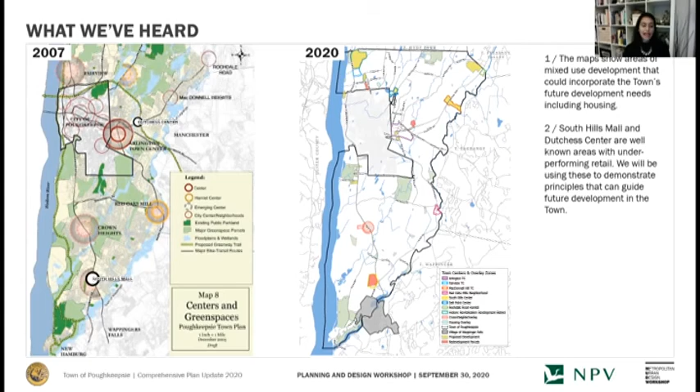So we're going to dive a little bit deeper into two areas, Dutchess Center right here and South Hills Mall. But this does not imply that these are the only places that can accommodate redevelopment. These were selected because most people are familiar with them. And the idea is that today we'll discuss how we can demonstrate and illustrate, through the help of these sites, best practices and how they might be incorporated to guide future development in the town.

So I'll walk you through some of the placemaking principles or best practices that can make for inviting and successful places. First, this slide talks about walkability. This is a highly desired goal that contributes to how welcoming and vibrant a place feels. But let's take a closer look at what actually goes into making a place walkable.

Safety can be achieved in a number of ways, but I think the one that is most pertinent in the context of this town is traffic safety. Using methods that allow for traffic calming, like wide sidewalks, bump outs at intersections, proper signage, and balancing the proportion of sidewalks versus space dedicated for car movement becomes really important.

In addition to traffic safety, things like transparency on the ground floor level, dedicated outdoor space, and good landscaping design also make for a more inviting environment. This is especially important given the current social distancing needs and a potential future emerging out of this trend. These images are from Mashpee Commons in Massachusetts, and they show how these elements can work together to create safe and inviting environments.

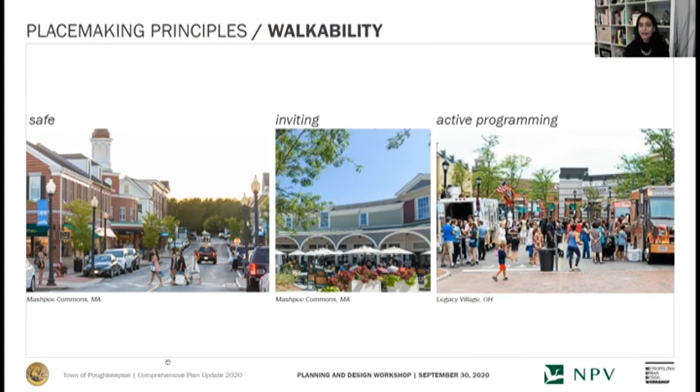We briefly touched upon the importance of outdoor spaces in the previous slide. While I don't imagine there will be any large events in the near future, what I wanted to show here is just how places that are flexible and can accommodate social distancing requirements, as well as be available for use throughout the day, can serve as great community spaces. There is an opportunity to create these places in these developments.

Now we come to another really important principle, which is mixed use. By mixed use, we mean a balanced combination and thoughtful distribution of residential, office, and retail, which can add a lot to the vibrancy of a place, promote a healthier live-work relationship, and also keep a place active by day and night.

This example to the left is from Legacy Village, Ohio. This is always cited as an example of a successful mixed-use community that has a combination of 1 to 3 story buildings packed in a really compact development pattern, which provides the critical mass needed to support these uses both by day and night.

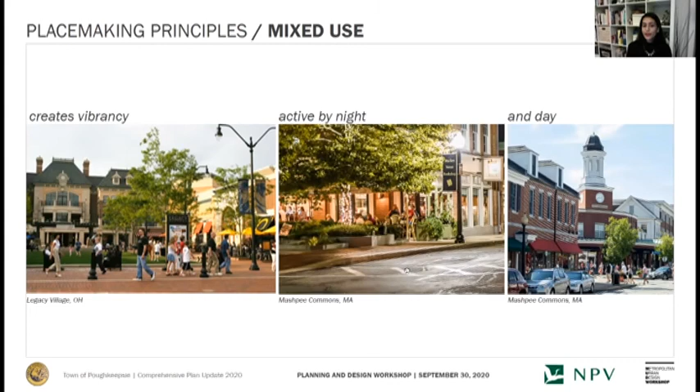What is great about mixed uses is that they keep an area alive during the day and night. These images from Mashpee Commons show active streets during daytime and nighttime uses that are supported not only by visitors to this place, but also by the residents who live in the area.

And then there is this reality that we all live in a cold climate, quite a few months of our year are quite cold. So how does one think about places that can still be usable throughout the year and don't lose their appeal in the cold weather? Thinking about how we do that is really important in this context.

The image on the left is from Princeton Shopping Center. What they've gone ahead and used as an architectural feature is sheltered and canopied walkways—a sheltered walkway on an indoor corridor, and on the outside, they're canopied.

And things like pop-ups and kiosks and winter uses like an ice skating rink that can be temporarily installed over community spaces also keep these areas active during the winter months.

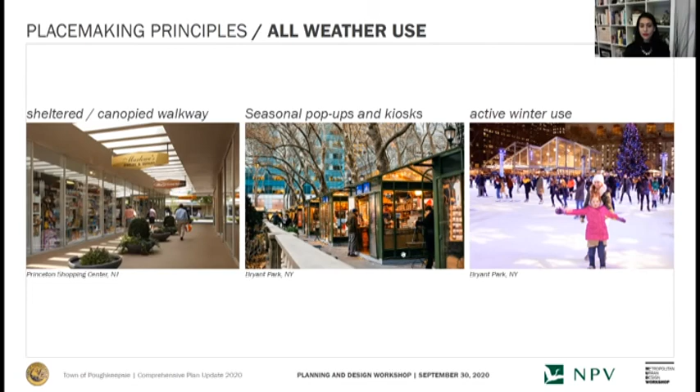The examples in the middle and the right are from Bryant Park. Bryant Park does a great job of transforming its park and walkways into an ice skating rink for everyone, and its walkways then accommodate both pop-up kiosks as well as pedestrians.

Another principle I want to talk about is local and national retail. I think that a balanced mix of both local and national retail is always a really good underlying strategy that provides ample choices for a variety of users.

This in turn ensures the long-term viability and success of a place, especially through different market cycles. So I think it's an important placemaking principle when you take the long-term view.

We discussed streetscapes and civic spaces briefly in our earlier slides from the point of view of safety and programming. But what I wanted to call out here is the importance of design. An example I want to cite is from Arlington Town Center.

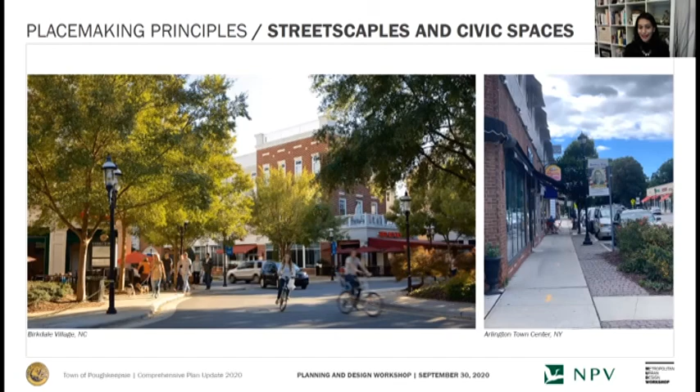I want to briefly touch upon environment as well, because Dutchess Plaza, which is one of the sites we will be discussing today, was built on a landfill. And it is also almost entirely within a 100-year floodplain.

And while there hasn't been any soil testing that proves there is any real contamination on the site, there still is a perception that the site might be contaminated because it is built on a landfill. So I thought it would be a good idea to discuss

phytoremediation here, because it is a very widely accepted, cost-effective environmental restoration technology. What it basically refers to is that we can use certain species of plants and associated soil microbes to reduce the concentrations of metals and other toxic contaminants in the environment.

A phytoremediation park can also act as a central community space, and it could also double up as a place for greater environmental awareness and education. So it's something to consider as a program.

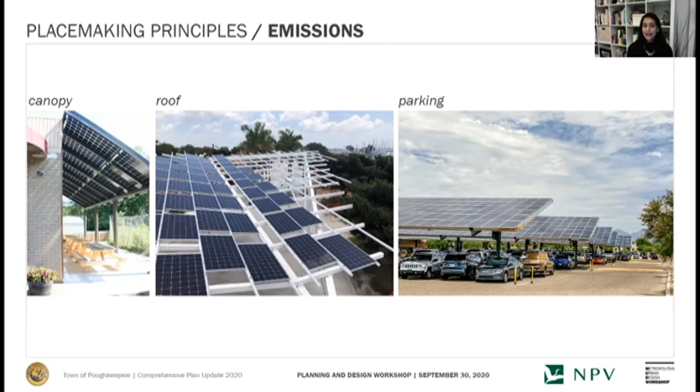When we visited the site, it didn't really seem that these buildings would lend themselves to any type of adaptive reuse. So I think a strategy here would be to consider the entire site such that redevelopment would be more ground up rather than an infill or adaptive reuse.

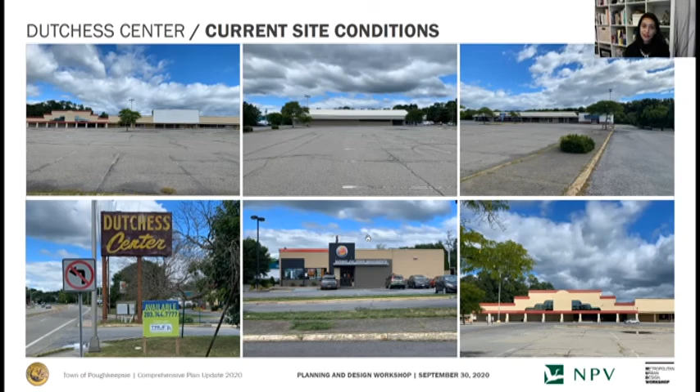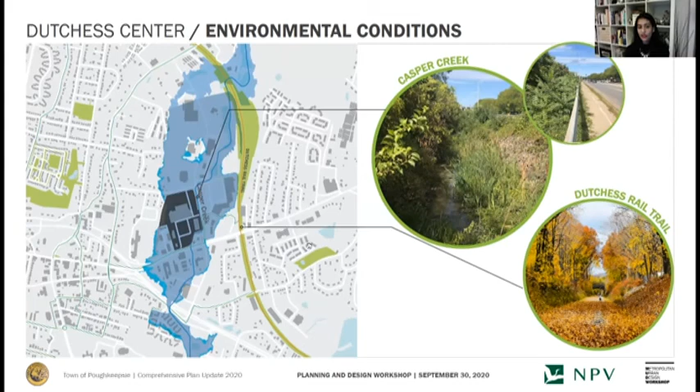Another thing to note is that through this little green bikeway and walk path, there is a connection to the Dutchess Rail Trail trailhead. You can see that closer in this slide.

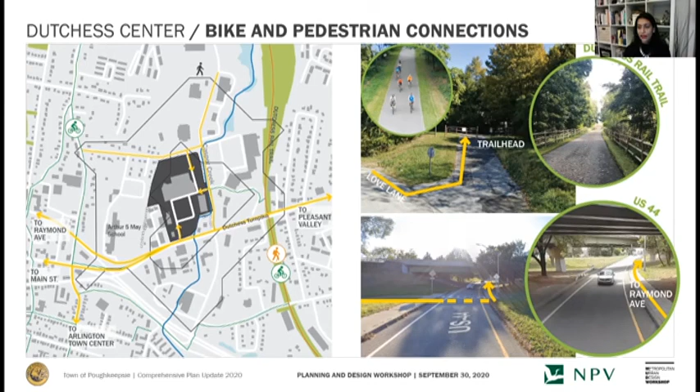It's good to note that the Dutchess Rail Trail trailhead is within a 10-minute walking distance, which is a huge opportunity. And then the other thing here is an opportunity to connect to the Arlington Town Center through this trail and going under the US 44.

In terms of vehicular access, the site is accessible on Dutchess Turnpike, and you can see it's a really wide route with very little refuge for pedestrians.

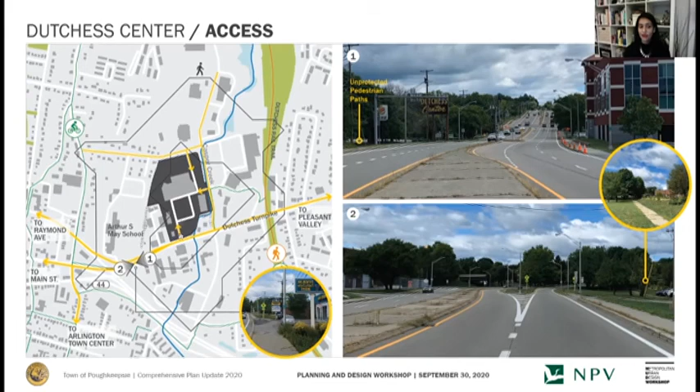There isn't really a traffic light at this access route from here on Dutchess Turnpike, but there is a traffic light at Burnett Boulevard, and it is probably a better access into the site.

At the back, through Friendly Lane, there is more of an access for service vehicles currently, and the green lines shown on the map show bike paths that surround the area.

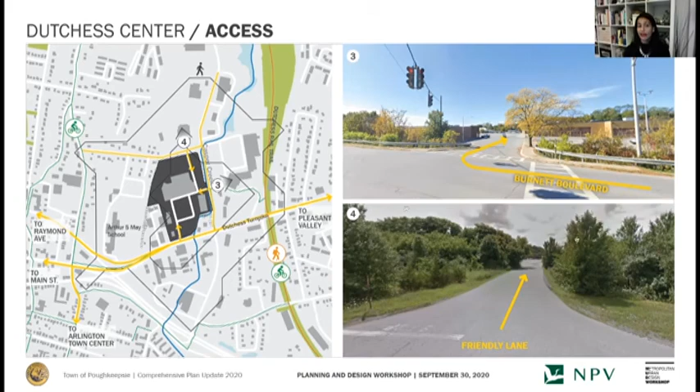There are several uses that are permitted. Again, at one point it was more thought of as a regional center, so we can again think about whether that is still relevant today or there needs to be some modification to that use.

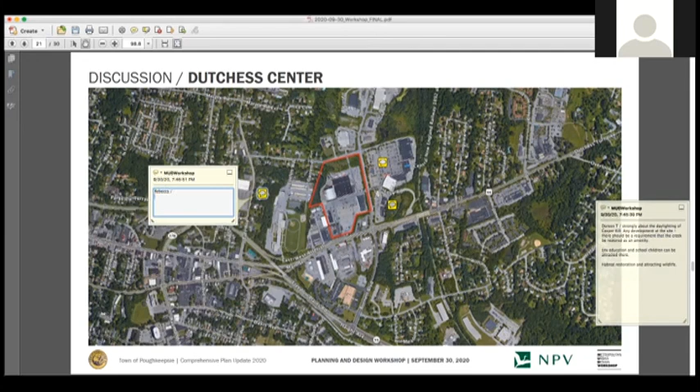Hi, how are you? Thank you so much for focusing on this site, which I think really needs to be redeveloped. One thing is that with the elementary school right there, it would seem like an ideal situation for young families, with the bike trail and already a grocery store, a bank, and a credit union available in walking distance, as well as the elementary school. Perhaps we might consider a development that's not necessarily exclusive for young families, but particularly tries to create affordable housing for young families and reduce their costs—maybe a place where you could live without owning a car.

A place that has free Wi-Fi, a place that might have childcare nearby, so that from the time your children are age 1 all the way up through 5th grade, when they leave Arthur S. May, you'd have places where your kids could stay nearby. Maybe there could be co-working space available for parents who might find a lot of their needs met very nearby. I have some interesting thoughts about the ownership of that site too, which is a little complicated, but that's for discussing another time. Thank you.

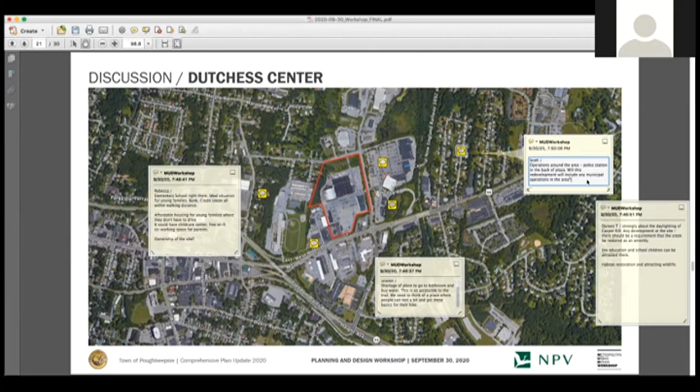The municipal operations you mentioned, to the north or behind the plaza, are actually a bit further north, so they don't necessarily have to move for this plaza to be redeveloped. But there has been discussion at different times about the facilities needs of the town, and the town's been doing some additional work on that. If you want to reach out to me in the planning department, I could point you toward those studies. Okay, all good, thank you. You're welcome.

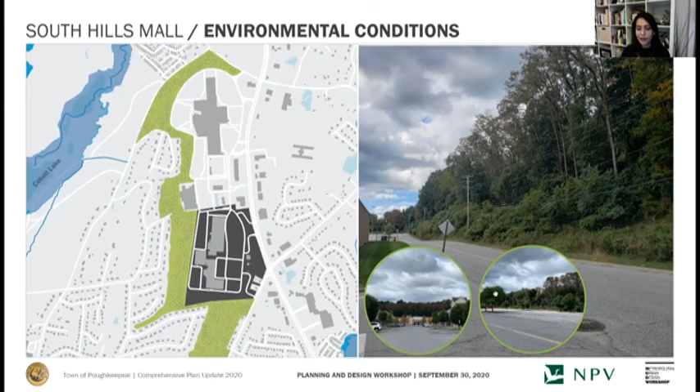But the more important thing is really just this buffer zone, which we can see to the right in this photograph. It's on higher ground. The site is pretty high and dry, and it is not within the 100-year floodplain. What's also interesting is that one can see this buffer zone because South Hills Mall is lower and these trees are a lot higher. You can see through these vistas in the distance the trees, and they're actually really beautiful. It's a beautiful buffer zone.

The next slide just talks about access to the site. Again, there is the 5 and 10-minute walking distance. Please do let me know if the slide has not advanced. Has the slide advanced for everyone? Okay, great. So there is the 5 and 10-minute walking distance that's shown here in the black line.

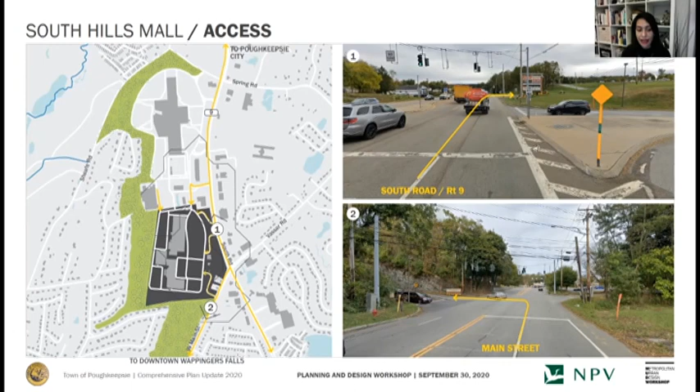The first image is showing access from South Road. The second image is showing access from West Main Street, which is a little bit calmer compared to South Road or Route 9, which is a highway. And in the back, this is service road number 3 right here.

The service road is right next to the buffer zone. It's actually really beautiful, even though most of the backside is taken up by parking lots. But maybe we could do something about how to intersperse parking lots with infill development.

And there is access from the shops at South Hills, number 4, which is again a more sort of smaller private street to get a more street-like character versus a highway to get to the site. But really it is accessed from South Road and West Main Street directly.

Another thing I'd like to point out is that there is this connection from the site where one can take West Main Street, which will take you to downtown Wappingers Falls. So if one does not want to get onto the highway, that is a connection that can be looked at as more walkable, more bikeable, and just safer than a large highway.

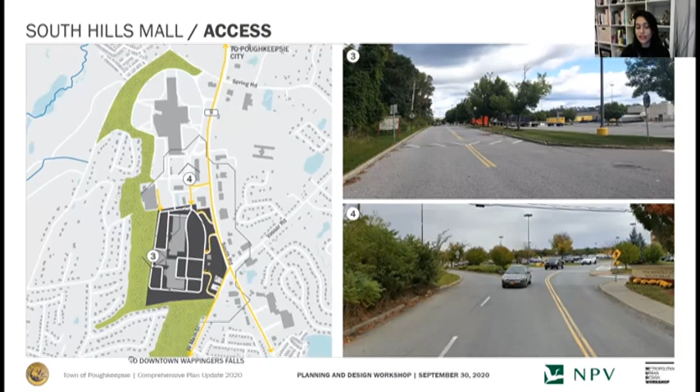I would like to point out that direct connection to adjacent areas through the buffer zone is not actually possible because of the topography, but what is possible is to take that connection I pointed out on the previous slide, to get onto West Main Street to access downtown Wappingers Falls.

And then, within the area itself, there was a purpose to create both an interconnected system for pedestrians and vehicles, and minimize the visual impact of automobiles with landscaping around the parking areas. So for that brief overview of the site...

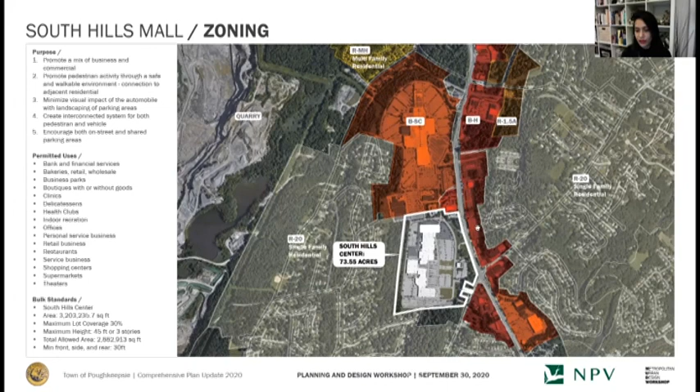Which I neglected to point out earlier, but I should say that there is multifamily residential to the north. It is not directly adjacent to the site we're looking at, but there is single family residential to the west of the site. Again, it is topographically on higher ground. And across the street, there is more commercial use.

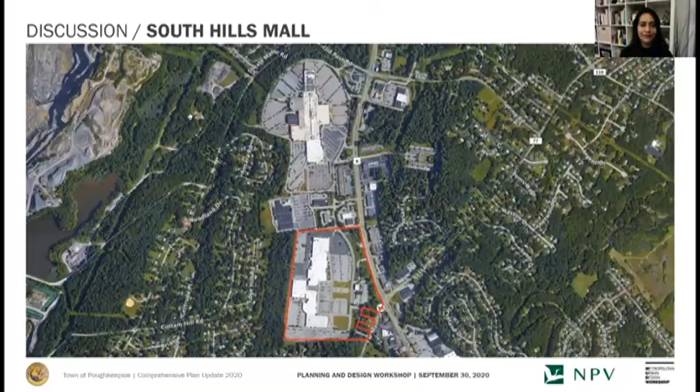Is everybody able to see the aerial image of South Hills Mall? I'm going to rely on you, Adriana, to tell me. Yes, we can see it. Great. So please let me know if you can still see it. Nope. Okay, that's what's happening. Is this okay? Yep, see it now. All right, thank you.

As you did in Dutchess Plaza, this is open for discussion and comments. So please raise your hand and Adriana will unmute you. Please introduce yourself and let us know what you would like to share with us, and if you have a question. Okay, Nancy?

Nancy, you're permitted to speak if you want to unmute yourself. Okay, I tried to unmute Nancy Kapler Foster, but she did not. She doesn't seem to be unmuting herself. Sharon Phillips?

Hi, this is Sharon Phillips. I see people biking down the median along Route 9, trying to get north and south and go to the mall. And I really wish that our concept and development was connecting communities, so that we're not like Wappingers and Dutchess and Spackenkill, that this is a smooth process where we move easily by bike or by walking to different communities. Right.

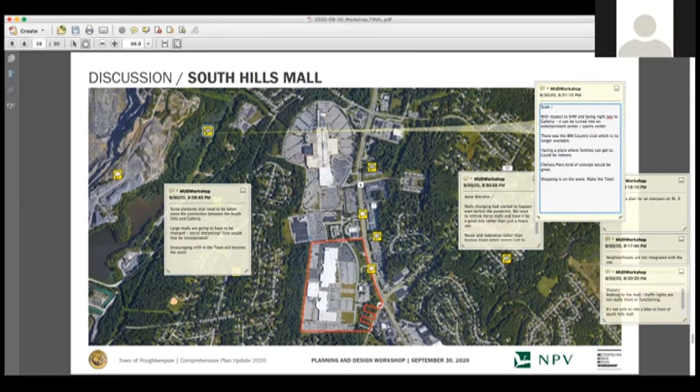We had a hand raised and now we don't. Ah.

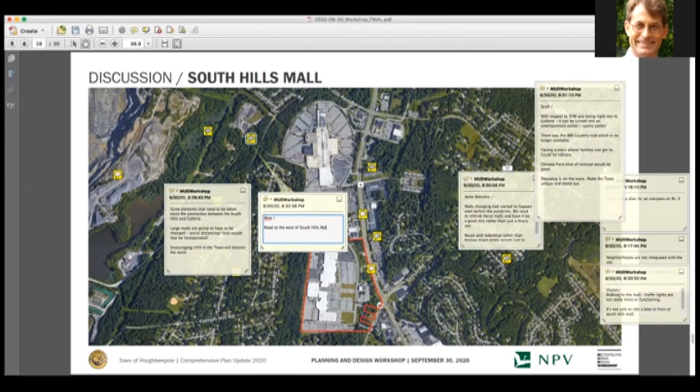Could you point to that road? Yeah, I believe it was between the two malls. There was a road that they cut short. Oh, the one that's ending right here, you think? Maybe, yeah. I just remember that they didn't want the traffic going through there, and so they disconnected that road.

But is that a possible access in the future as we decrease the volume, or with limited access through pedestrian or bicycle? Right, and I heard someone say earlier that at some point there was a proposal to connect the surrounding communities a bit better, but that the communities were opposed to the idea of the traffic going through them. But again, that's understandable.

But again, I don't know when, how long ago that opinion was held and how it has changed here today in 2020. So I think all of you are here today—what do you think?

There's a bit of a conversation going on in the chat. Cottam Hill Road was closed off. It went through about where Lowe's is now. So that would be where you were pointing? This area? Yeah, that is the Lowe's right there. What's the name of the road? Cotton Hill. Cottam? Yeah, we have it in the chat too, Sachi. So yes, yep.

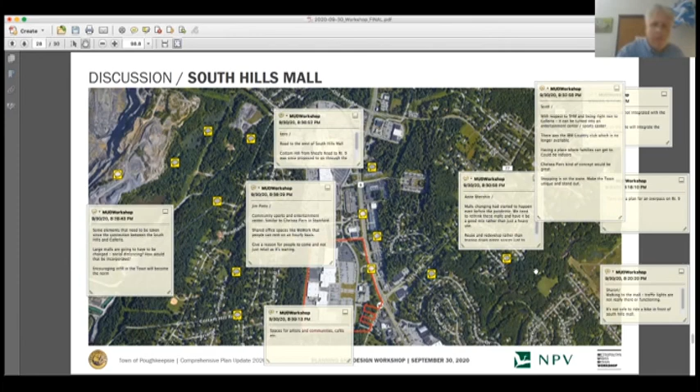This is Mike Welty from the Town Planning Department. I just want to thank you for your comments. We appreciate getting them, though this isn't exactly the right venue for them. The Comprehensive Plan Committee is really looking out 5 to 10 years into the future, and making recommendations about the entirety of the town.

I do encourage you to continue to make your concerns known to the Planning Board and the Zoning Board of Appeals, where both of those applications are currently being looked at. That's really where those concerns need to be addressed. I would hope these people would help future residents and the current ones, to do the right thing. Thank you very much, I appreciate your time.

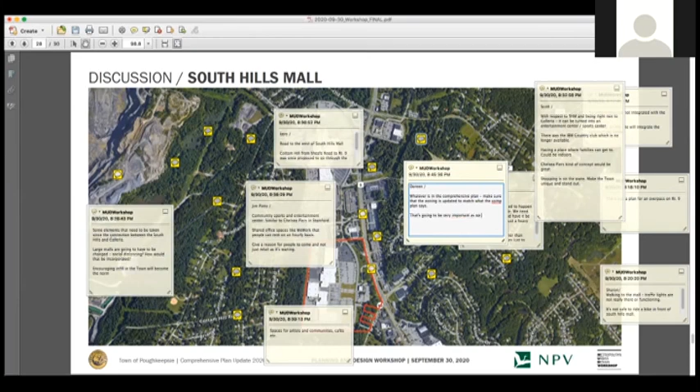And then, of course, you are at the mercy of the zoning board when people ask for variances. But as Mike said, that's another story. Again, it is important for the zoning code to be updated to match the comprehensive plan. Thank you. That's a great point, thank you.

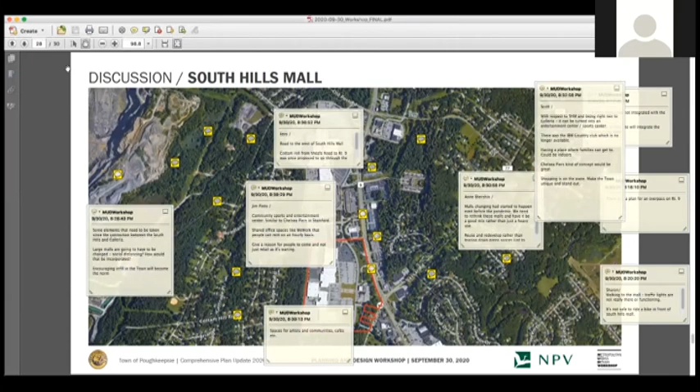I think I'd have to unshare my screen and reshare it, because it won't advance for you if I don't. Please give me a moment. Can you see now? Nothing has happened. Oh, I'm so sorry, it's being a little challenging today. It's not a webinar if there aren't technical difficulties. One more second please, we're almost there. Okay, are we on to the next page now?